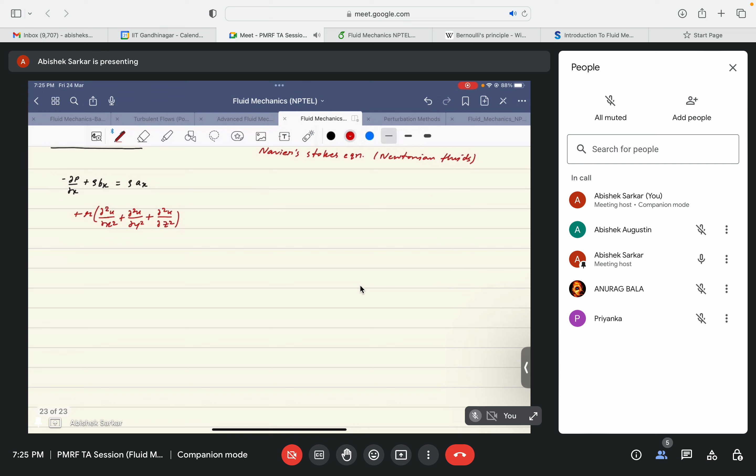So I guess we could write it as mu, in Cartesian coordinate. Yeah, I'm right I guess, the viscous term would be denoted by this, if I'm wrong just point me out, because these are very long questions, I may forget. So rightly pointed out. This Euler's equation, again just for comparison, I will write the Navier-Stokes equation as well, I will write it in vector form, it's very easy, concise and easy to understand.

So for Navier-Stokes equation in vector form, it will be written as - again if I'm wrong please correct me - plus v dot... And Euler's equation, since you got the concept right, only minus the viscous term from Navier-Stokes gives the Euler's equation.

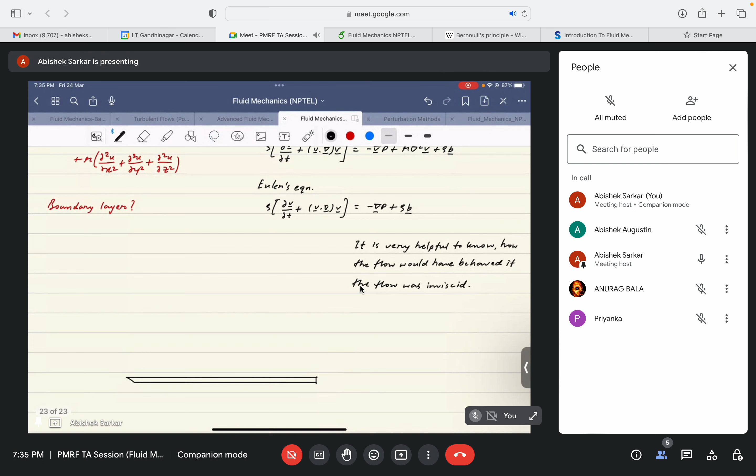So as rightly pointed out by Priyanka, boundary layer is a region where the viscous effects predominate. Viscous effects dominate and drive the flow, you can say. Actually, I'm not conceptually correct - viscous effects are dominant, you can keep it like that.

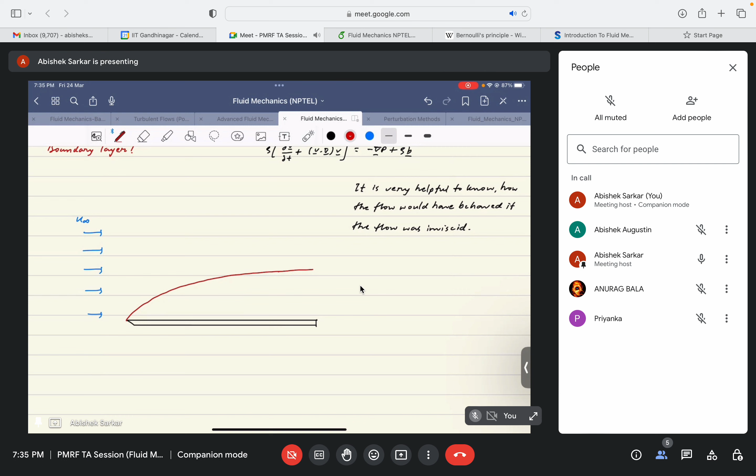So say this is a flow over a flat plate. There is some u infinity that approaches the flow, the free stream velocity denoted by u infinity, and after striking the plate it generates a boundary layer. Let me use a different color. You need to know that boundary layer is not a physical line or entity - it is just an imaginary line or surface. It's actually the point where the velocity u becomes 0.99 of u infinity.

So you can draw the velocity profile like this. This is uniform, but just after reaching the boundary layer, the velocity at the surface would be 0. Why? Could anyone tell? Because of no slip condition. Thank you, everyone said correctly. So because of the no slip condition, the velocity at the plate surface is 0, and because of momentum transfer from the upper layers of fluid traveling at higher velocity, the velocity of the flow would increase.

So it will increase up to what maximum value can it reach? The u infinity - yes. So the maximum value that the velocity could reach after starting from 0 at the surface of the plate would be u infinity. But for very good reasons, we take a limit up to 99% of u infinity. So we say that the point at which the velocity reaches 0.99 of u infinity, that point we consider as the boundary layer. You can see after reaching this point the velocity becomes almost equal to u infinity.

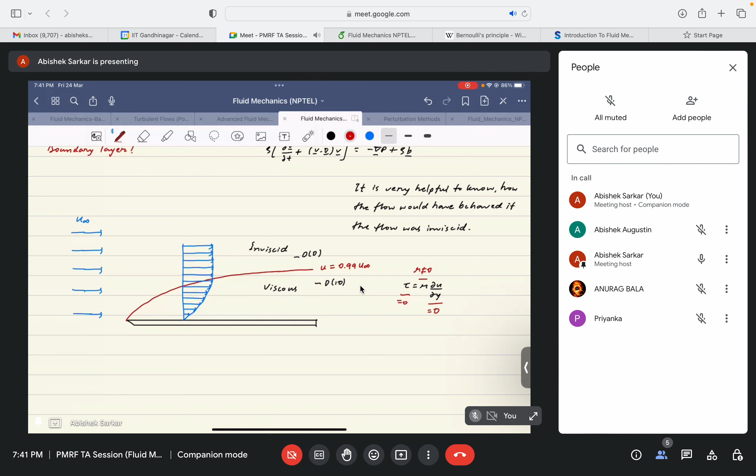Dou u by dou y should be 0. So only when this is 0, tau can be 0, because mu is a property of the fluid. There is no meaning of mu equal to 0, right? It is not possible, so del u by del y equal to 0.

So the concept of boundary layer is that, listen carefully, after crossing the boundary layer, the velocity gradients become so small that they cannot manifest the shear stresses because of the presence of the plate. Is that clear?

What I mean is that within the boundary layer, you will have some certain value of del u by del y. Mathematically, you can see there is a certain slope here, and this slope decreases up to a point where it becomes 0. You need to take into consideration the coordinate system, like if you measure the slope from here, then this slope becomes infinity.

So I'm considering measuring it from here. It is initially very high. If you rotate a bit, measuring the slope from here, say this is theta, this is very high, right? This is very high, theta 1 is high.

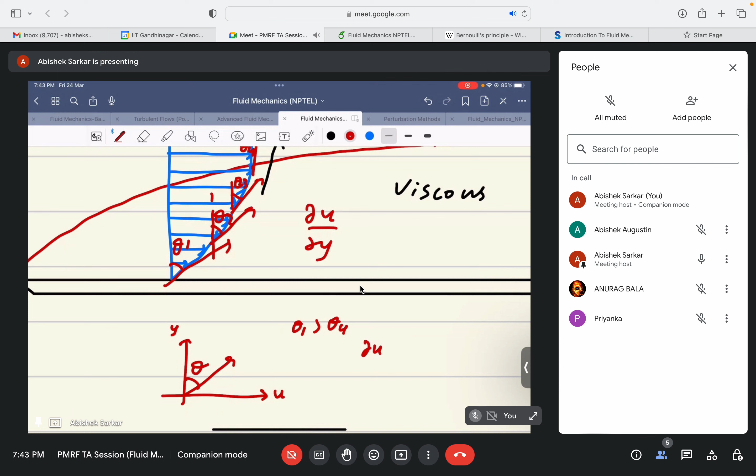u, and you're considering theta from this side, then the slope would be given by del u by del y. I'm not saying this one, I'm saying theta is that one. So be clear: given this coordinate axis and measuring the angle from the y axis, del u by del y basically gives the slope, right? So you can see here that when we reach the boundary layer, the slope becomes almost equal to 0, right?

But it is not equal to 0.

In theory, you have to move very far away from the plate to have the velocity gradients equal to 0. That's why it's 0.99, not exactly u infinity. But for certain approximations, if you continue, it would be more accurate at 0.999, then 0.9999, and so on up to n order. But for engineering perspective and to save time, we say up to 0.99 accuracy.

So keeping that in mind, you can see the slope almost becomes 0 at the boundary layer. This basically means that when del u by del y is almost equal to 0, what do you think the shear stress would be? It will be almost equal to 0.

And what will be the shear stress here, near the plate? Very high, right? Very high. Am I right? Are you confused? Shear should be very, very high near the plate.

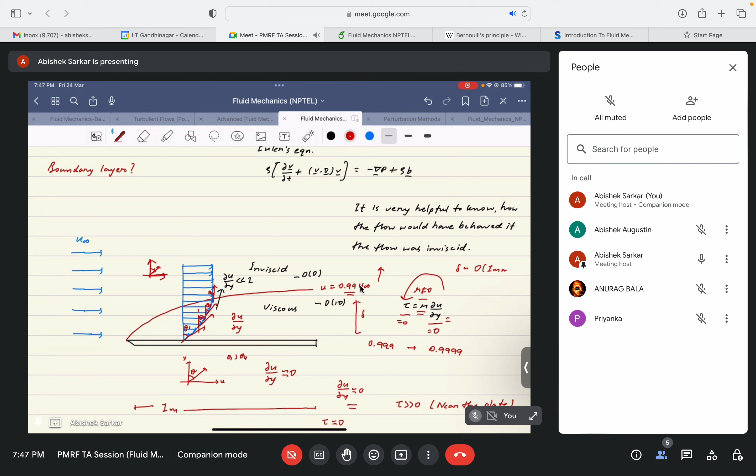If the plate is 1 meter in length, say, and this is again a vague understanding, after solving the boundary layer equations, I'm just recalling the answers, but it is of the order of 1 millimeter.

So now could you improvise your answers, like why to study inviscid flow, even if the flow is predominantly viscous all the time, or not predominantly, it's actually viscous all the time, but still we need to study Euler's equation or inviscid flow? Now could you improvise your answers on why to study Euler's equation?

Because outside the boundary layer, we can consider it as inviscid flow. Yeah, absolutely. See, if you draw to scale again, just as a vague approximation, if this is the flat plate and this is the flow field over the flat plate. If you draw to scale, the boundary layer would be, I should zoom in, the boundary layer is only this region.

So you can see, I guess, understand where the viscous effects actually dominate, and the rest of the region is predominantly inviscid. This is viscous.

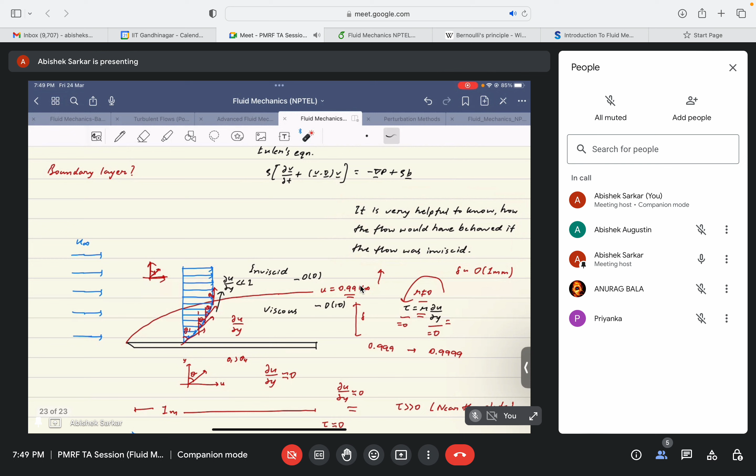Again, to know, if we reach this statement, say if we knew the flow pattern above a flat plate or any geometry, keeping the assumption that the flow was inviscid, then the similar flow pattern would have been available for most of the flow field except this region.

There are very mathematical connections, there are perturbation theory, I guess you read, you can see in this page. So there's perturbation analysis to relate or match the solutions from the inviscid flow and the viscous regime. But this is beyond the scope of this course, just to give you an idea, because predominantly the predominant part of the flow field is dominated by inviscid flow.

Flow is viscous but the velocity gradients are too small. Here also mu is not equal to 0, but del u by del y is equal to 0. Velocity gradients are small, that's why the flow is treated as inviscid. And since most of the flow field is inviscid, it's better to have an idea how the flow would have behaved if it was not viscous. So is it clear up to this point why we study Euler's equation?

Yes, sir, clear. Thank you so much. So I guess the discussion part is enough for this. Regarding the derivations, I strictly suggest you look at Professor Chakraborty's lectures. He has derived it very beautifully, so I guess you will understand more. Also I cannot discuss it further because I have to discuss some questions too. So I will directly go to the questions and answers.

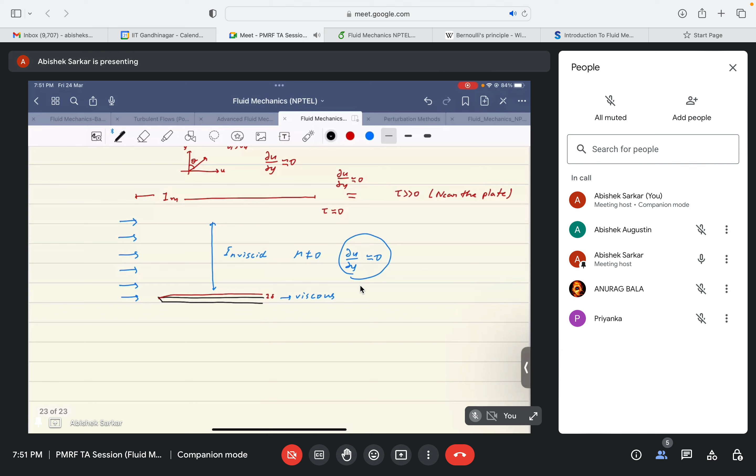So let's discuss the questions. I'll dictate the question once, and I should say this week's questions are quite involving, so you need to solve it yourself, and then tell me the answer, and also tell me how you have solved it, and then we'll compare.

A steady two-dimensional inviscid flow field is represented by the stream function psi equal to a x square y, where a is a known dimensional constant. Consider two points, P at 1, 9, and Q at 3, 1, in the flow field, in Cartesian coordinates, it's 2D. Which among the following statements is or are correct?

So you can see the options. It might happen that you have solved the question before, but still, if you tell the answer, you need to tell me the steps, how you have solved it. So please read the question and tell me what would be the correct answer.

Psi is given and a is constant, so we need to find whether the flow is irrotational or rotational, or whether Bernoulli's equation could be applied between the points P and Q. So all the assumptions considered, you need to cross-verify them by mathematically doing that. It may take some time, but I encourage you to do that. We have, I guess, one hour, but I don't think we will need one hour, but still you can try.

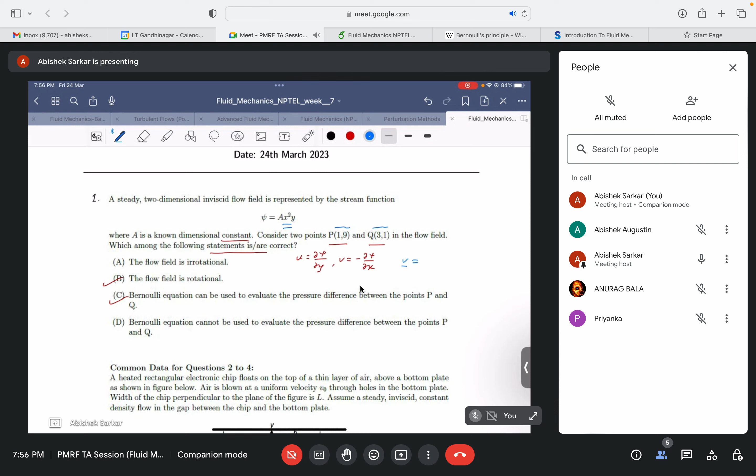Okay, so you have found out U and V. I guess you can write V in the vector form as U i cap plus V j cap. Am I right? Yeah, okay. And then to find whether the flow is rotational or not, you have evaluated del cross V, right? Yes, sir. Okay, so I guess she is right, and I also have followed a similar procedure.

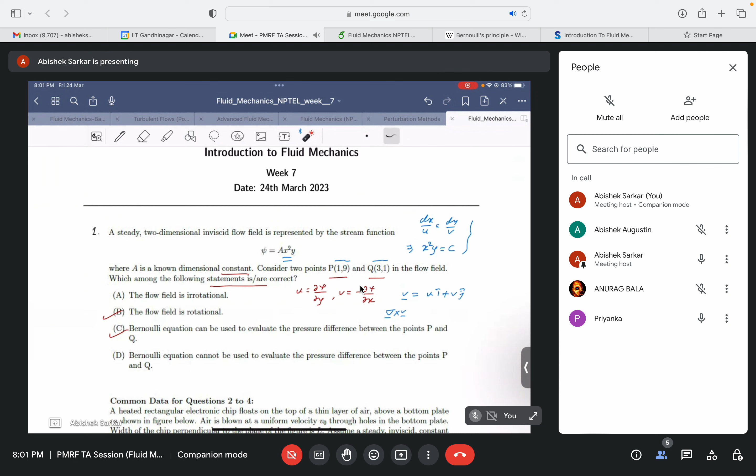Okay, so I thought, okay, it satisfied the equation. Okay, so you need to correct it. So actually, when you do that, you get the equation of this one. Okay, Abhishek and Anurag, if you have doubt at any point, you can stop me. Okay, I will repeat it again. So you get the equation of this from x square y equal to c.

I will tell you again, a much simpler form without the need of solving this much. You can just write it, but let's go through the pain right now. So if you substitute the value of x, the coordinates in this equation, you'll find that you'll get the same value of the constant. You will get the value of c as 9 here as well.

Since the constant value is the same, these two points lie on the same streamline. If it's not mentioned whether the flow is irrotational, then Bernoulli's equation is valid only along a streamline. But since we have already found the flow is rotational, Bernoulli's equation will only be valid for points that lie along the same streamline. Since these two points lie along the same streamline, this is also a correct solution.

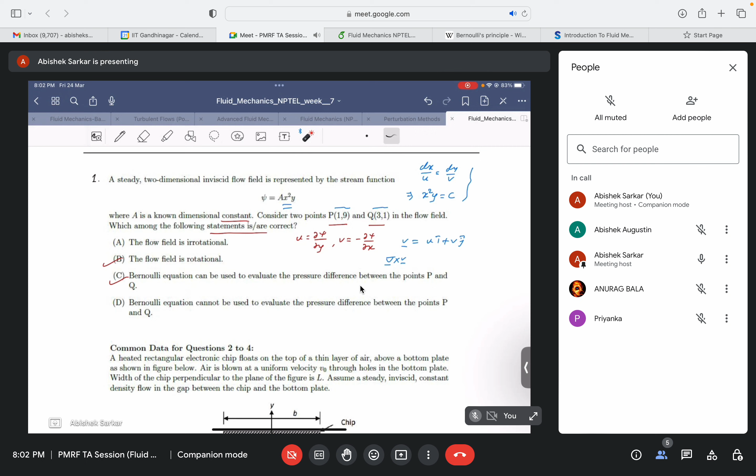But there's a shortcut, and actually I guess this should be the right approach. You can directly substitute the value of these points in the stream function. For P you will get 9a, and for Q you will also get 9a. So psi 1 and psi 2 are the same, meaning they lie along the same streamline. It's just a shortcut, you can follow the same steps with just an additional constant. So I guess it's clear up to this point. The first question is clear.

Sir, what was the special assumption of the Bernoulli's equation you mentioned at the starting? The thing is, usually there are four strict assumptions: the flow is steady, inviscid, the density is constant, and Bernoulli's equation would be valid along a streamline. That's because we consider Bernoulli's equation for two points, so these two points should lie along the same streamline.

But if the flow is irrotational, that is the curl of the velocity field, del cross v, equals zero, then we can say Bernoulli's equation will be valid for any two points in the flow field. So if the flow had been irrotational, there's no need to check whether they lie along the same streamline. You can directly say the Bernoulli's equation is valid for points P and Q, whatever they may be, because the flow is irrotational. But since the flow is rotational now, you need to check whether P and Q lie along the same streamline. Since we found they lie along the same streamline, we can say Bernoulli's equation can be used to evaluate the pressure difference between the two points P and Q.

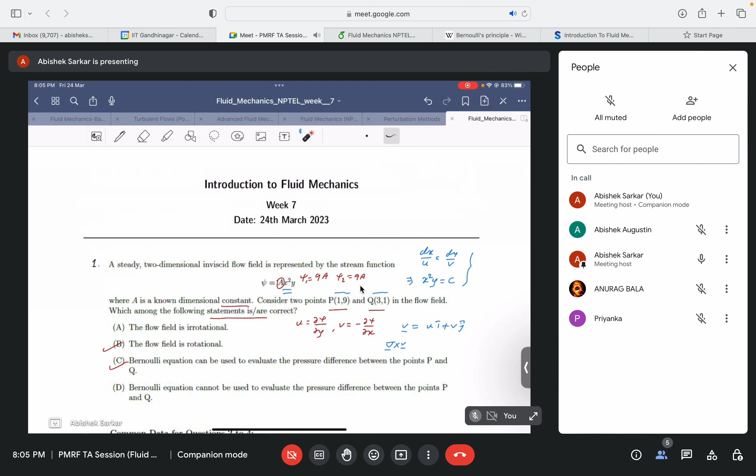I guess that was clear. Yes sir, okay, thank you.

So we look into the second question, and again it's a common data type question. Let's look at the question.

A heated rectangular electronic chip floats on top of a thin layer of air above a bottom plate, as shown in the figure. Air is blown at uniform velocity v0 through the holes in the bottom plate. The width of the chip perpendicular to the plane of the figure is L.

So basically this means that if it is along the Z direction, the plate having a chip has a length L outside of this sheet. Assume a steady, inviscid and constant density flow in the gap between the chip and the bottom plate.

I guess you're getting it, they're strictly mentioning the assumptions of Bernoulli's equation. So given these assumptions and this diagram, I insist you draw the diagram first, just a rough diagram, so we can look into the question. Is the question clear? Just read it, I guess it's clear.

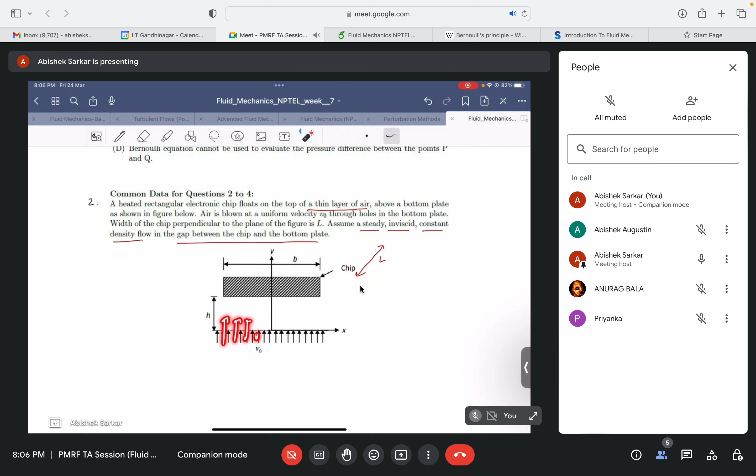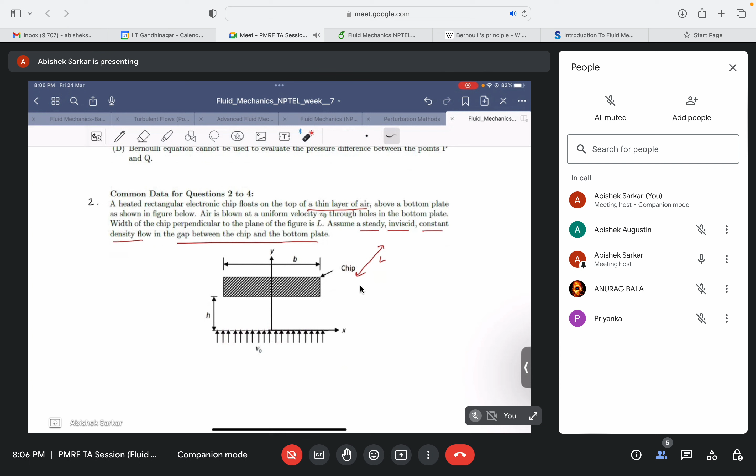A chip is floating over a bottom plate through which a fluid is flowing through the holes from the bottom plate. So air is flowing through the holes, which is balancing the weight of this chip. This is the question, or they're describing the question right now, building it up. This is how they have described the question.

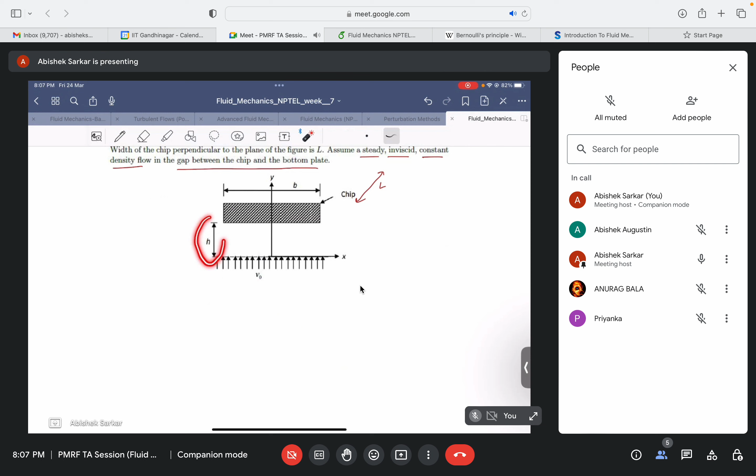Is it clear? Because I need to scroll down to look at the next part of the question. I hope you have drawn the diagram, and they have mentioned dimensions. Initially it is floating at a height of h from the surface of the bottom plate, and it has a length of b. So they have asked the question.

The velocity field in the gap between the chip and the bottom plate is given by these four options. So you need to find the velocity field, basically the u and v components of velocity within this gap. I hope it is clear, you need to find u and v.

Please go ahead, at least try. I think this may be a bit difficult because you need to apply a lot of concepts together. That's the gist of the course - as we go deeper, you need to pile up all the concepts and apply them to the concerned problems. You just cannot forget the previous concepts, you need to apply them too. So please try, you may take some time, I'll be here.

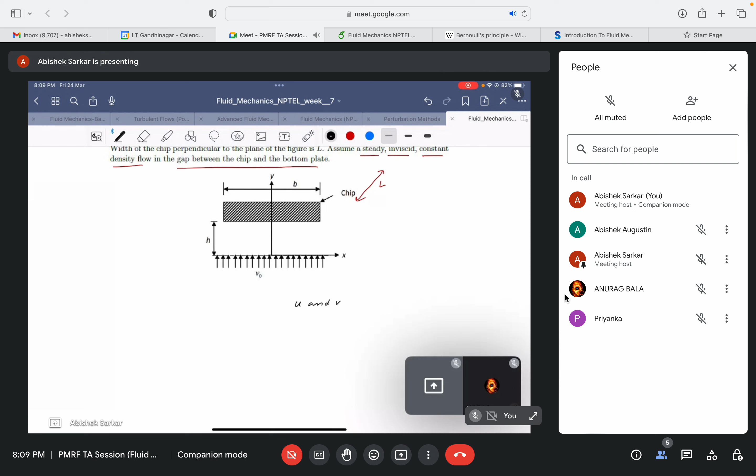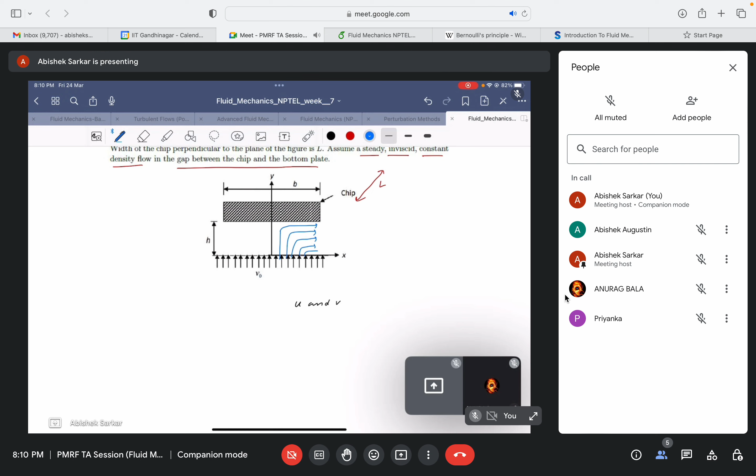Sorry again. Hello, sir, yeah, yeah, please go ahead. Yeah.

Okay, let me go to the options. Yeah. So U is, Okay, u is equal to sir, option B. b. Okay, okay. U is B, sir, B, B. b. B. Okay, okay. D. I'm sorry, D or B? This one, right? I'm Second one, sir. this one, right? Yes, Okay, okay, sir. okay, okay. Sure. Yes, Sorry, sir. I'm sorry. I'm having slight difficulty in hearing. That's why I'm asking. Sorry.

So you're saying it is v naught x by h, and v is equal to minus v naught y by h.

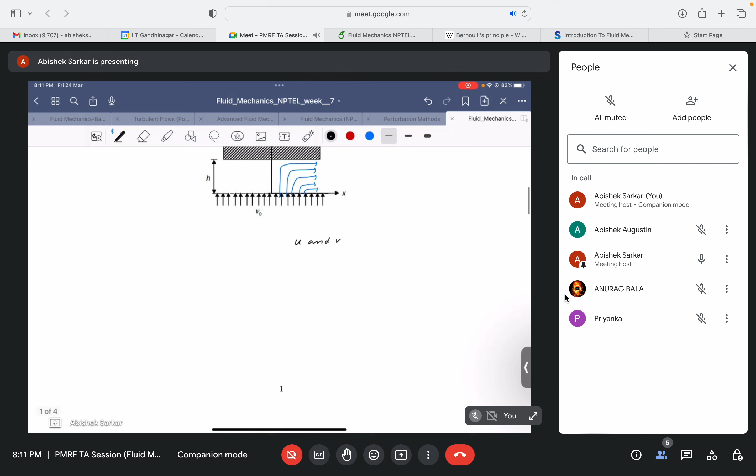Okay, let's go through it again. So how did you find it? Let me go back to the diagram. I was just trying to visualize the flow field myself, but I think it is not right. Still, you can tell me. Please go ahead.

Use the equation of continuity, sir. Okay, tell me, I don't know, please. I took a small section - a small rectangular section. Okay, I'm trying to draw it because I think you have taken something like that, it would only make sense.

Is that so? Yes, sir, it extends up to here. What do you say? Okay sir, extend - this one, right? Okay, right, actually yes sir. Okay, and then so what would be the inlet?

The inlet will be V naught. Okay, let me write it - tell me. V naught into... no, no, X into L. No, tell me. Okay, V naught into X, no, no, into... no, L, sir. Wait.

Just out of concern, I feel like you're having some cold, so is it very difficult for you to speak up? I don't want to pressurize your throat if you're having a cold - you can speak a little bit also, just fine. Tell me, fine, yes sir, slight cold is there. Okay sir, okay, I understand, that's fine.

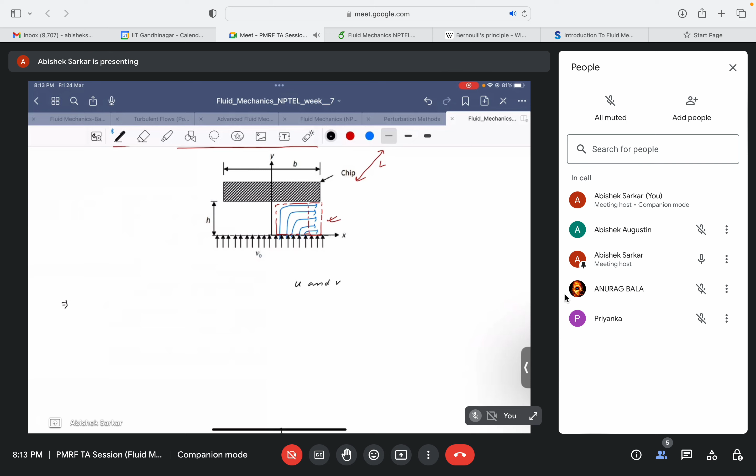Okay, so I already did it. So here what I have done is I have drawn a diagram, and my apologies that I have drawn the control volume in a wrong fashion. She was right, I should extend it up to here, so the control volume should extend up to the exit for accuracy.

So it should be here, but I guess you understand it gives the same idea. So this is the chip, it is floating. This is the inlet velocity, and they've mentioned strictly that it is equal to v naught. So here I is the inlet and E is the exit. So basically the flow comes through here, strikes the plate, and since it has nowhere else to go, it exits through here.

The same flow is symmetrical, so it will follow the same fashion - it will strike it and go here. I'm just doing half of the flow field because it is symmetrical, there's no point solving the entire geometry. It will be symmetrical here also, so I guess it's clear up to here. The coordinate system chosen is this is the y direction and this is the x direction. I guess it's clear up to now.

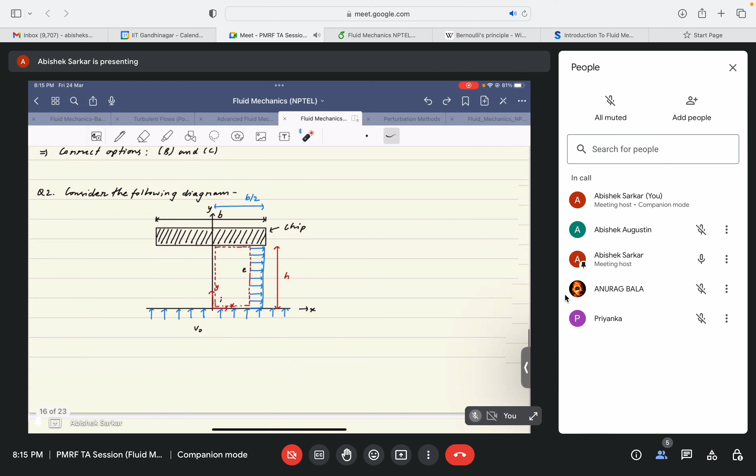And this is the height up to which the chip is floating. So we need to find out the u and the v velocity components, and in the second part of the question you need to find the acceleration also.

So since the flow is steady and constant density, the continuity equation takes this form. The time derivative term will get omitted because the flow is steady, so that will equal to 0. So we only deal with the inlet and the outlet mass flux.

So Ai Ui equals Ae Ue. Ai is the inlet area, Ui is the inlet velocity, Ae is the exit area, Ue is the exit velocity. So the inlet area I have taken as L into X, because say this is the length X.

I have not taken it directly as B by 2 because, with this control volume, I guess for my assumption it was okay because of how I considered it. This is right, so I have to take up to X, not up to B by 2. So for this control volume, my inlet area will be L into X. L is the 3D outward length, and X is this length.

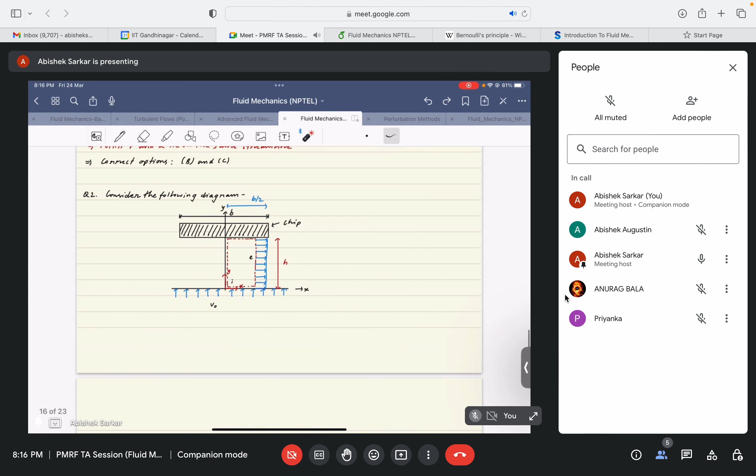So this is the inlet area, and similarly what would be the outlet area? Outlet area would be L into H. So this height and depth L, it is L into H. That, I have only written as A.

Then the inlet velocity is constant, which is equal to v naught, and the outlet velocity we don't know. Since the flow is inviscid, we can assume that it does not have any viscous effect, so the velocity will be constant throughout the height. We can only say it's constant when the flow is inviscid, because otherwise it would have some boundary layer effects, as we discussed just before approaching the question.

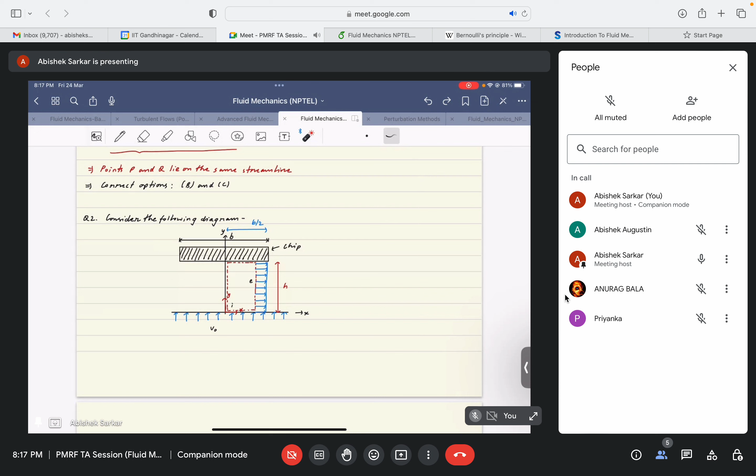We have discussed the boundary effect and how it affects the velocity profile. So since the flow is inviscid, we can assume that the velocity profile at the exit will also be uniform throughout the length. It would not vary along y, it may vary along x, but it would not vary along y. Is this concept clear?

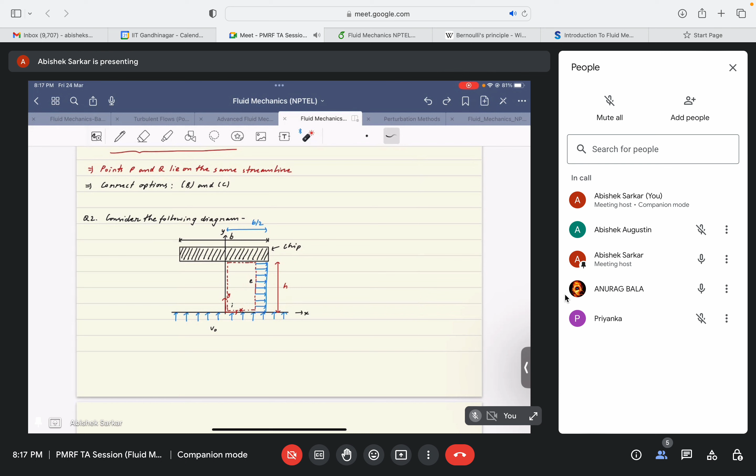Yes, sir. Thank you. And that's why we have taken it only as a function of x. So you can get that u(x) would be equal to v naught x by h. I guess this is clear up to this point.

And again, to find out the v component of velocity, we again take the help of the continuity equation, so where you get that del u by del x plus del v by del y would be equal to 0. I'm sorry, this is not the continuity equation, this is actually the mass conservation equation.

The entire mass conservation form, we simplify it to obtain a continuity equation, but this is the entire mass conservation equation. And then by applying the continuity equation, we get del u by del x plus del v by del y equal to 0. How do we get it? Because rho is constant, so rho cancels out, and all del rho by del x and del rho by del y terms cancel out because rho is constant.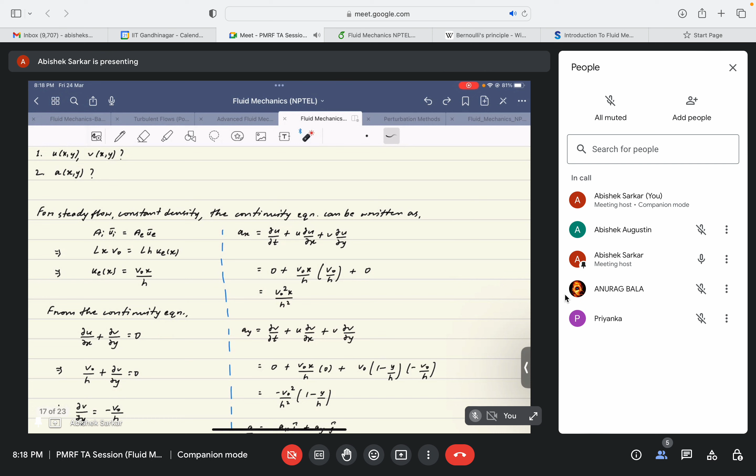And again, the steady part is, because the unsteady part is 0, so we reach this equation, del u by del x plus del v by del y equal to 0. And since u is equal to v naught x by h, we substitute it here, so del u by del x would be equal to v naught by h, right?

So we get v naught by h plus del v by del y equal to 0, and del v by del y equal to minus v naught by h. So when we integrate it, we get minus v naught y by h plus some function of x. Why? Because this is a partial derivative, so we cannot directly say it would be a constant, but it can also be a function of x. Is that clear?

So it would be some function of x. Then we apply the boundary conditions. I guess here we only know one boundary condition. One of the boundary conditions would be this: at y equal to h, v equal to 0. That is, when y is equal to h, v would be equal to 0. Why? What is this boundary condition known as?

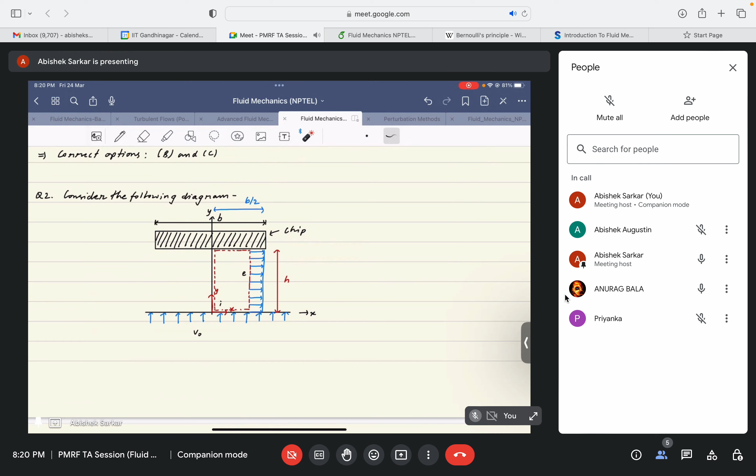So the velocity cannot pass through the chip. Yeah, exactly. So this is known as the no penetration boundary condition.

So keeping that boundary condition in mind, we get that f of x would be equal to v naught, and we substitute this here to get v is equal to v naught times 1 minus y by h. So we get the velocity fields from mass conservation and the continuity equation. I guess it's clear up to this point.

So when we look at the options, I guess option D would be correct, right?

And I feel Priyanka has missed the f of x part, the partial derivative part. Yes, sir, that's why. So keeping that in mind, we get u and v as this.

Now they've asked us to find the acceleration of the fluid particle in the gap between the chip and the bottom plate. So it's very easy. You know u and v, so you need to find ax and ay.

So yeah, Priyanka, I can say that you can try and just tell me the answer. You don't need to explain, you can just tell me the answer after you have solved it. I guess Anurag Abhishek has left. Anurag can also try, since you know how to obtain the acceleration of a flow field when you know the velocity components, right? So you can also give it a try.

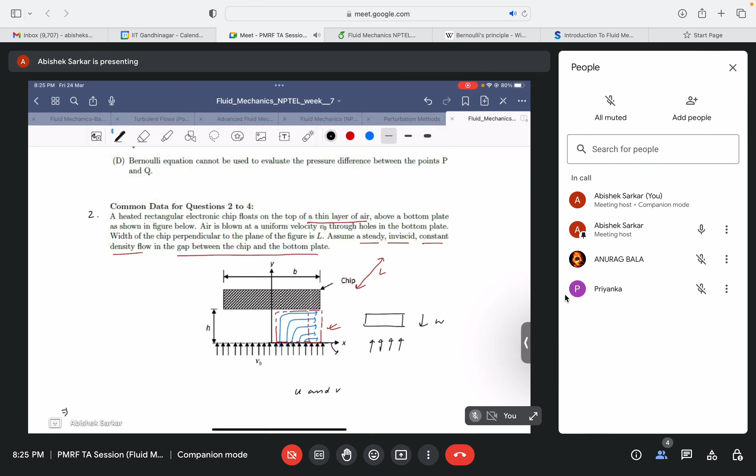So it is mentioned in the question that it is in equilibrium, okay? The body is not falling, it is at a constant state. The weight is exactly balanced by the mass flow rate, so this mass is not moving at all, it is at a constant state. So keeping that in mind, you are asked to find the weight of the chip.

Okay, this is a bit tricky question, and actually Professor Chakraborty has discussed a similar example in the lectures. So if you remember that, you will be able to solve it. But if you cannot, that's also fine, because it's a bit tricky part. So I insist you to try. Anurag, since you've not attended, it's fine. But Priyanka, if you've attended, you can give it a try.

So just as a help, I would encourage you to draw the free body diagram of the present case. Like, you can draw the free body diagram. That would be very helpful.

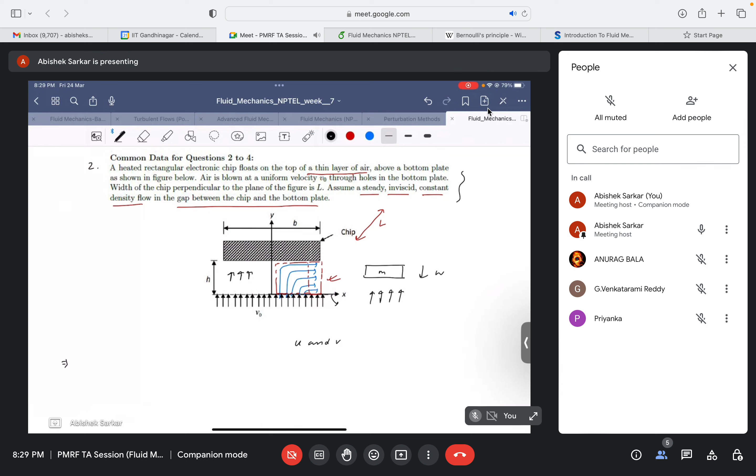So you can give it a try, that's fine. If not, don't worry, it's fine, because it's a bit difficult for me to repeat again. But if you want, you can give it a try. Others are also trying, so we can compare what is right or wrong. So yeah, you can give it a try, or else just be here so you can see how to approach it. Is that fine?

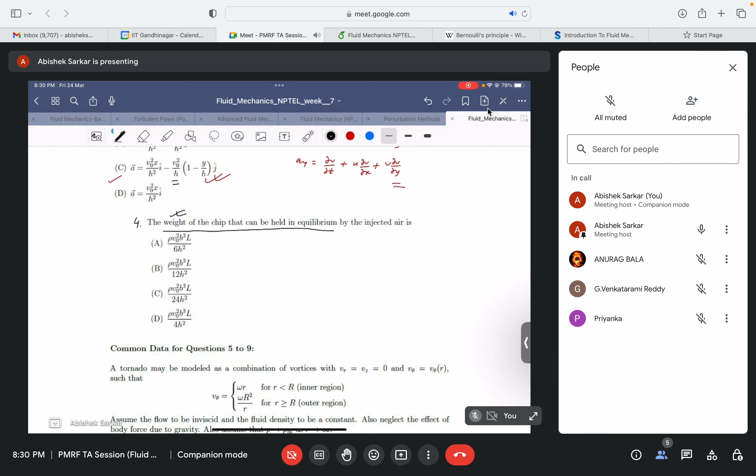Okay. So yes, Priyanka. Second option. Second option. Yes sir. Okay, the thing is it's correct. That's why I'm very happy. It's correct, so it will be very good.

If you're feeling a bit fine, you can tell me the few steps or just the formula. Okay, let's draw a free body diagram. Could you help me, how to draw the free body diagram? Say this is the chip. So what are the forces acting here? Please help me out, that would be helpful.

Sir, there will be pressure from bottom. Okay, weight. Wait, let me draw. Pressure from bottom, so P. So there would be weight and something else. Atmospheric pressure. Yeah, this is very important and essential, because I also ignored it while solving it first. But after watching Professor Chakraborty's lecture, I realized the mistake I was making.

So it's very important. Okay, so after that, given this free body diagram, now you know. Could you just tell me the important steps? That's fine, I don't need detail, I already have the solution, but tell me the steps, how you solved it first.

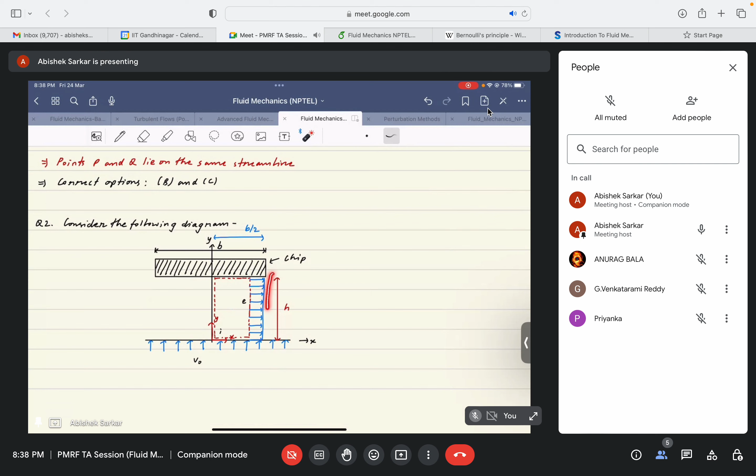From the geometry itself you can understand, because here the pressure would be the atmospheric pressure, right, it is p equal to pa. So keeping with that boundary condition, we get the expression for p, which is a function of x.

So again applying the free body diagram and balancing the forces, you get this expression for W. Weight is equal to 2L times the integration from 0 to b by 2 of rho v naught squared by 2h squared, b squared by 4 minus x squared, dx. So you integrate it, for the equilibrium condition.

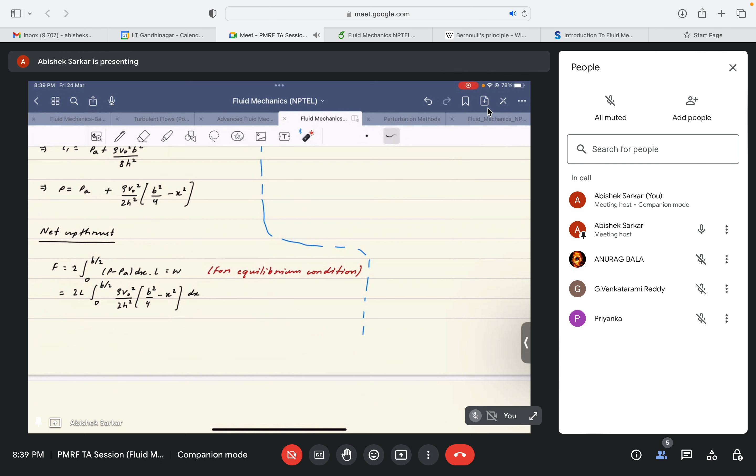So you integrate it to get the final expression like this. I guess the steps are clear, because I'm not doing it hand by hand - the steps that you need to follow are more important than the solution itself. Okay, Anurag and Venkatarami, I guess the steps were clear. Okay, so we are short of time now, but we have some time to deal with the next question.

So this is the second question, third question for today's session. That is, a tornado

may be modeled as a combination of vortices with Vr and Vz equal to 0 and V theta equal to V theta of r. V theta is a function of r, such that V theta is equal to omega r for r less than R - treating it as a circle, for the inner region at r less than R, the velocity field V theta is given by omega r, where omega is the angular velocity and constant since it's not otherwise mentioned. V theta is omega R squared by r for any region outside the radius of the tornado.

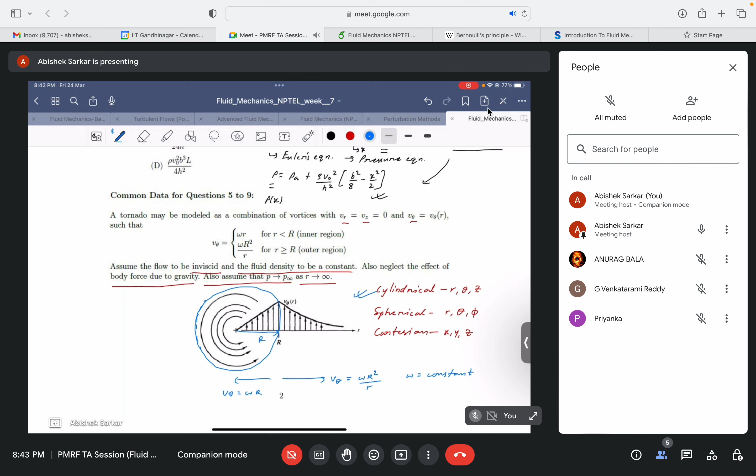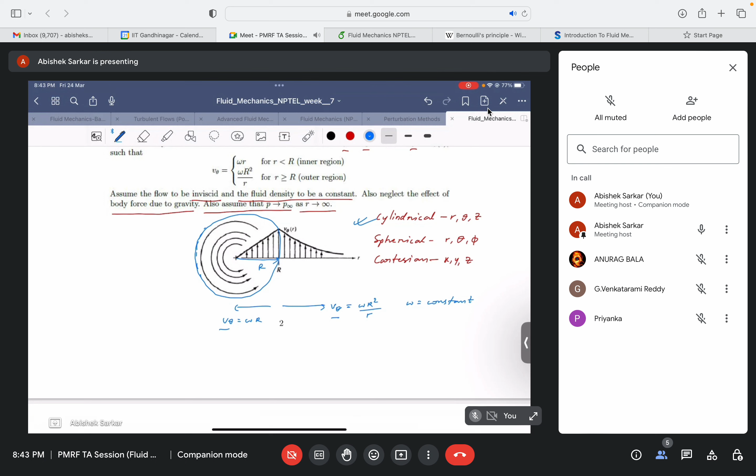There is no use of equations in Cartesian form here. So you need to think, or go back through your notes and see what the governing equations were in the cylindrical coordinate system. But let's see what the first question asks. I guess the question is clear - they've told that V theta is different for the inner region and outer region of the tornado. So the first question, question number 5, is: which among the following statements about this flow field is true? You can check the options.

Okay, let me draw and write it so it will be easy. It is omega r for r less than r, and omega r squared by r for r greater than or equal to r. Given this velocity field, you should check which of the following options are correct. We only have 15 minutes left for today's session, so I would insist you go a bit fast - I'll give less time for each question, sorry for that, but still try. I'll give you 3 minutes for question number 5, so please go ahead and at least try, then let's see what happens.

Sir, option C for the fifth one. C, okay let me check: the flow field is rotational in the inner region but irrotational in the outer region.

Okay, you have solved it, but let me ask Anurag to tell what she actually did here to get the correct option - what do we need to do actually? Checking the curl of... yeah, absolutely correct. You just need to find the curl of the velocity field, which has only one single component, v theta. You need to find del cross v for both the inner region and outer region. So what was it for the inner region, Priyanka? What was the value of del cross v?

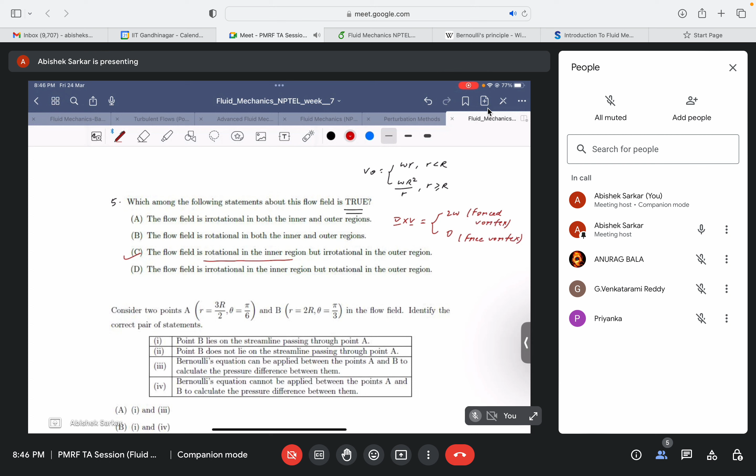I'll go a bit fast since we are short of time. Consider 2 points A and B. Again they have used the r and theta coordinate system. For A, r is 3r by 2 and theta is pi by 6. For B, r is 2r and theta is pi by 3. In the flow field, identify the correct pair of statements. Please go to the statements and tell me which is the correct one.

So since it is beyond R and it is irrotational, can we say that we can apply Bernoulli's equation? Are you saying that the Bernoulli equation can be applied between points A and B to calculate the pressure difference? Okay, so statement 3 is correct. So what is the correct option? There are pairs of solutions, right? Statement 3 appears in both A and D. So which is correct, A or D?

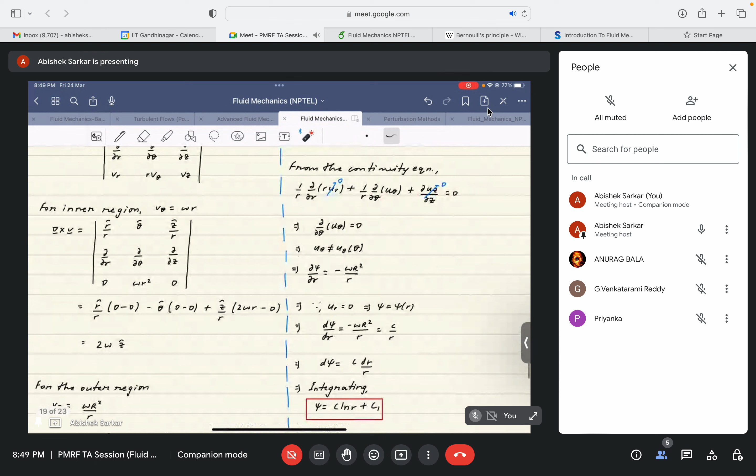Since ur is equal to 0, we don't need to deal with the r coordinate system, so it's completely fine. We can directly say that del psi by del r is equal to minus omega r squared by r. Keeping this equation, we integrate it since psi is only a function of r, because it is not a function of theta - you get this from the continuity equation.

So you can say del psi is c del r by r. When you integrate, you get psi equals c natural log of r plus some constant. Here you can directly see that psi varies with r and does not depend on theta at all. Is it clear that psi is equal to c ln r plus c1, an arbitrary constant? So here you can see that psi depends only on the radius of the tornado.

Okay, so since in this question r1 and r2 are not equal, this implies two different streamlines. These two different radii imply two different streamlines, and that's why these two points do not lie on the same streamline. Point B does not lie on a streamline passing through point A, so the correct option would be D, 2 and 3.

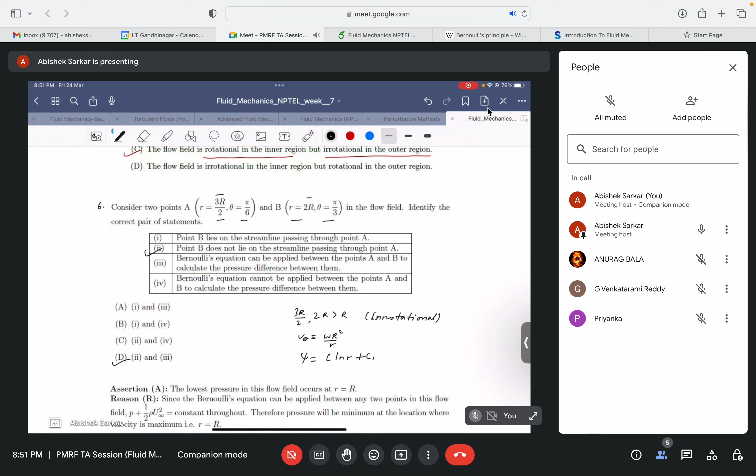But since the flow is irrotational, you can apply Bernoulli's equation at any two points in the flow field, so you can apply it at point A and point B, but these two points do not lie on the same streamline since it depends on radius. If these two radii would have been the same, then you could have said that point B lies on the same streamline passing through point A.

Is that clear? Yes sir, yes sir, thank you.

So let's take the last two questions. Again, I'm very short of time. So assertion A, this is an assertion and reasoning type question, question number 7 I guess.

The assertion: the lowest pressure in the flow field occurs at r equal to R. The reason given is that since Bernoulli's equation can be applied between any two points in the flow field, p plus half rho U infinity squared is a constant throughout. Therefore, pressure will be minimum at the location where the velocity is maximum, that is at r equal to R.

So which of the following statements is correct? We can say reason is false.

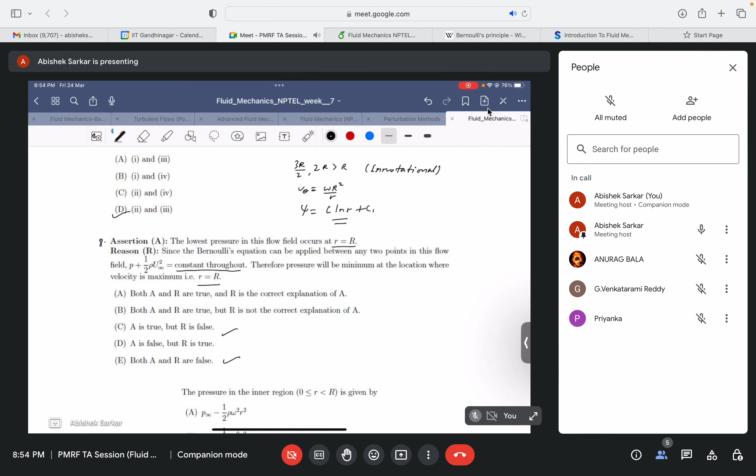So since we're short of time, if you all don't mind, I will just show you the solution, how we solved it, and you can try it later. The gist is that you need to find the pressure field.

Find the pressure field for r less than R and r greater than R. You need to find the pressure field for both regions.

Is that fine if I show the solution? Yes sir, I'm very sorry, okay, you're short of time, so that's fine.

So we need to find the pressure field, right? We again apply the Euler's equation along the r direction, because you will eventually see that the Euler's equation along theta and the z coordinate gives you 0, since the velocity field is 0 there.

So eventually all terms with 0 will be equal to 0, and you will find that p is only a function of r. So del p by del r is equal to rho v-theta squared by r, and from the theta and z coordinate equations you get del p by del theta equal to 0, implying p is only a function of r. Keeping that in mind, we integrate the equation with respect to r, and we get that p equals the integral of rho v-theta squared by r dr, plus some integration constant.

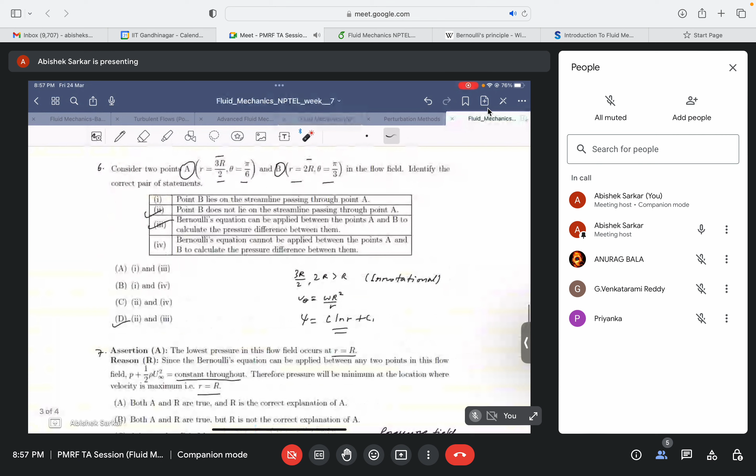Then we integrate it. After integration, we get this equation. Okay, then we need to find the arbitrary constant, right? So to find the arbitrary constant, we use the boundary condition that I have mentioned, that P tends to P infinity as R tends to infinity, where they have strictly mentioned here. So use this condition to find the arbitrary constant.

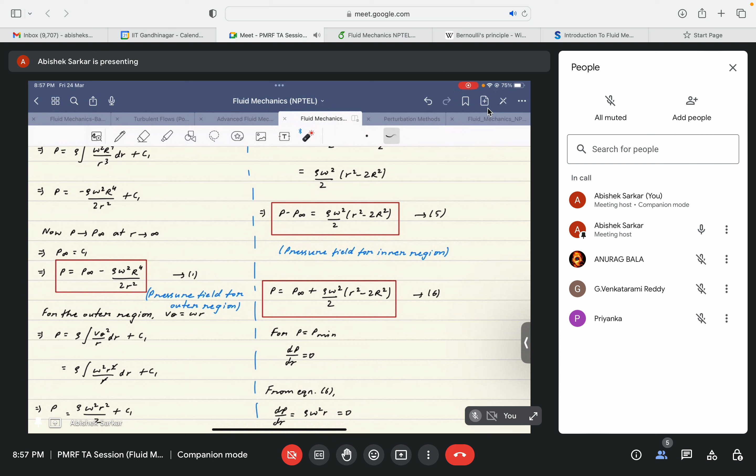So using that condition, we find that C1 is equal to P infinity. So we get the pressure field for the outer region as P equal to P infinity minus rho omega square R to the power 4 by 2R square. And again, since the velocity field is different for the inner and outer region, we need to find the pressure field at the inner region. So again, sorry, this should be the inner region.

Yes, for the inner region, then again we substitute the value of v theta in this equation. Then solving it, we find the expression as P minus rho omega square R square by 2 is equal to C1. Then again we need to find the value of C1.

But here the thing is that if we use a similar boundary condition, that P tends to P infinity as R tends to infinity, what do you think the problem would be? We will get the infinity term in the constant, this term will go to infinity, so we cannot use that condition.

Okay, so what we do is that we assume a condition, let P equal to P naught at R equal to R.

Say, because see, similar to the Bernoulli equation, if P minus rho omega square R square is equal to a constant, then P1 minus rho omega square R1 square by 2 is equal to P2 minus rho omega square R2 square by 2. Is this correct? Like I have just used the concept from the Bernoulli equation.

Okay, so we say that at P equal to P naught, sorry, let P equal to P naught at R equal to R. We don't know what is the pressure at the radius of the tornado, so we assume that it is equal to P naught. So keeping that in mind, we substitute this condition at the right hand side to get that P minus rho omega square R square by 2 is equal to P naught minus rho omega square capital R square by 2. So is this step clear?

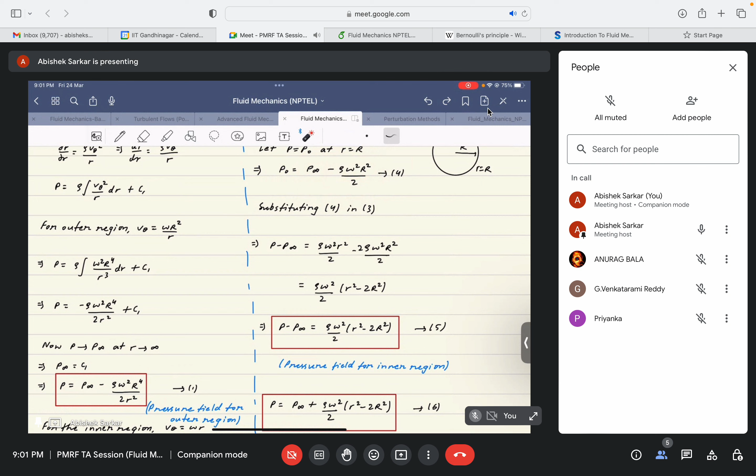Okay, so now what we do is, since we know the functional form of P naught in terms of the known constant values - P infinity is constant, omega is constant, R is the radius of the tornado, constant, as given in the question - we substitute equation 4 into equation number 3.

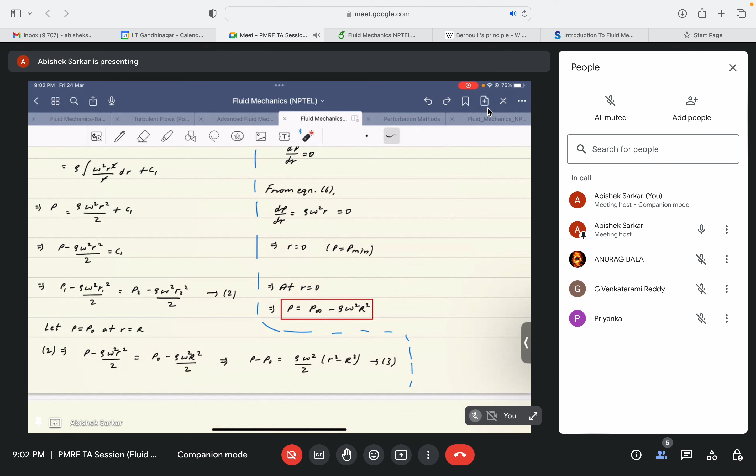We substitute the value of P naught in this equation. After doing that, we obtain this equation: P minus P infinity is equal to rho omega square by 2, times R square minus 2R square.

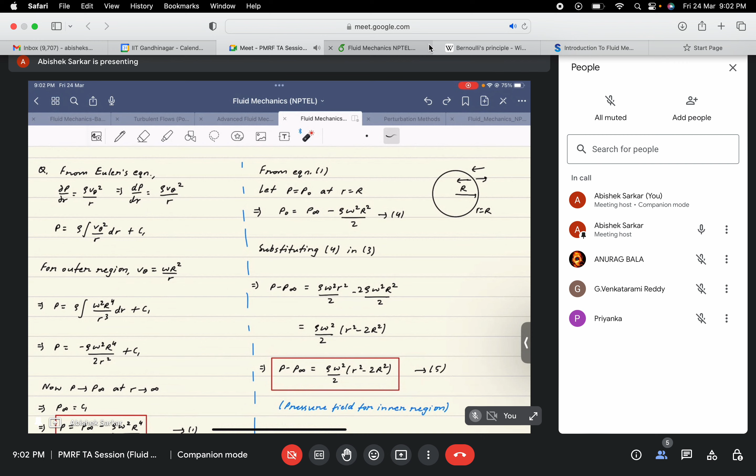And indeed, this is the next question that has been asked: find the pressure field in the inner region. So option C is the correct option.

But we still don't know the solution to question number 7 or question number 8. We don't know whether the pressure is lowest at R equal to R or not. So we get this equation.

Now, since we know the expression, we take this term to the right hand side, we get P equal to P infinity plus rho omega square, R square minus 2r square.

By the concept of derivative, if you recall, del P by del r, because r is the independent variable in this case - it is with respect to r that we need to find where the lowest pressure lies. So we take the independent variable as r in this case.

If the first derivative of this is equal to 0 and the second derivative is positive, what would it indicate - minimum pressure or maximum pressure? Minimum. So keeping that in mind, the second derivative will actually be positive, because rho is positive, omega square is positive, so it will get a positive value.

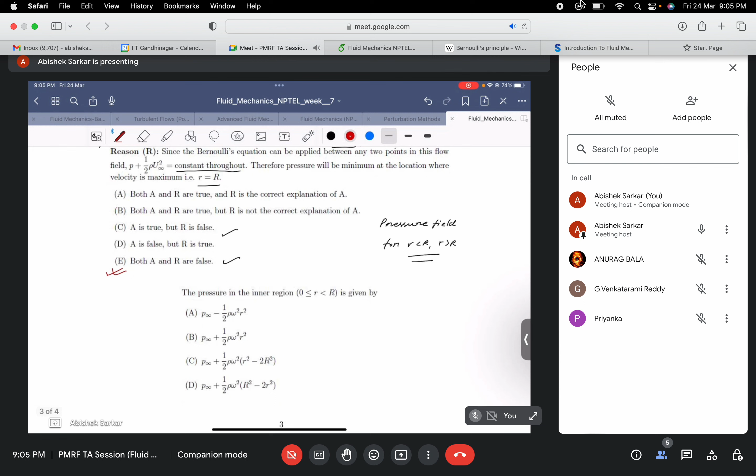Yes sir. So what would it mean? That it is wrong, so the correct option is option E - both A and R are false. Question number 8 we have already solved before solving question number 7, because we obtained the pressure field in the inner region.

The final question I have asked is, what would be the lowest pressure in this flow field? We know that the lowest pressure is at r equal to 0. So we substitute r equal to 0 in the inner pressure field to obtain P equal to P infinity minus rho omega square r square.

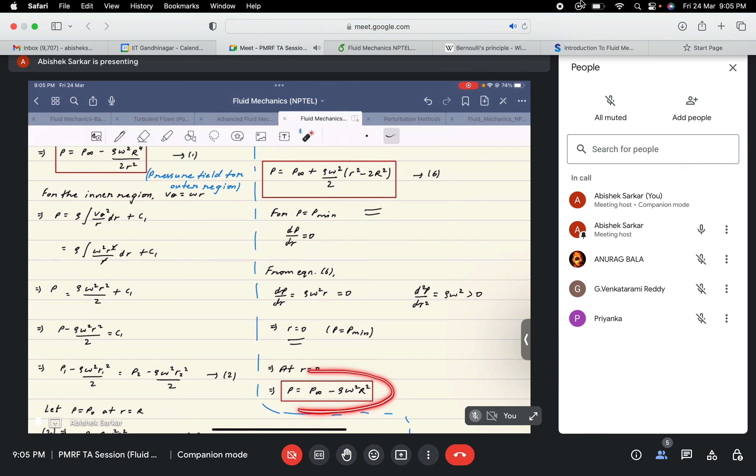Because if we substitute r equal to 0 here, the 2 and 2 get cancelled out, so we get P infinity minus rho omega square r square. So checking the options, we find that this is the correct option.